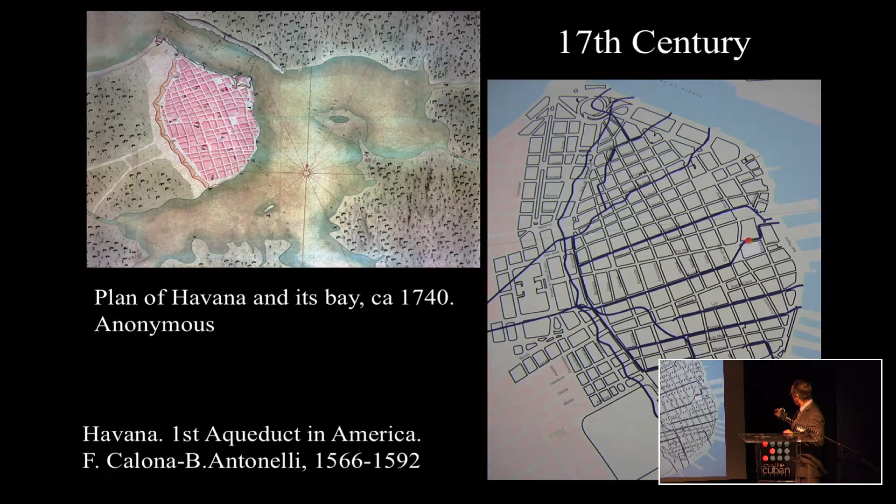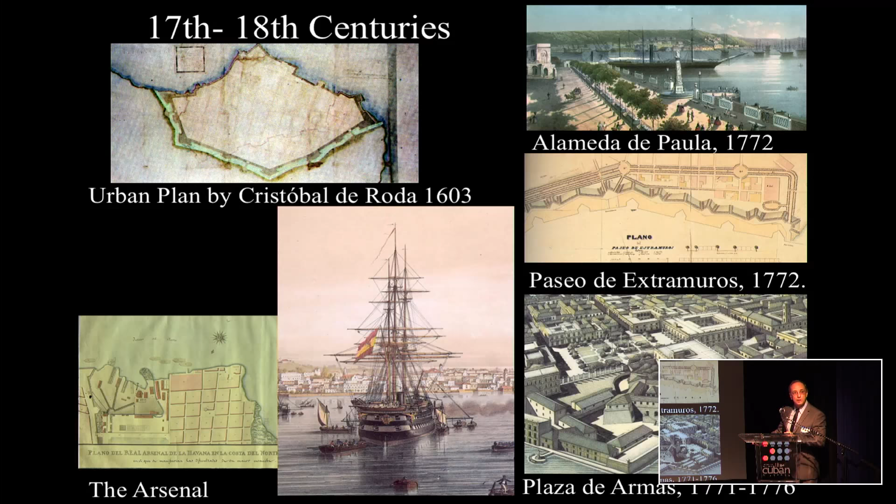And then Havana became the most important colony for Spain, as we know. So everything would be rehearsed there. Everything would happen there before any other place. And that would also be a trademark for Cuba along the years and along the centuries.

In the 19th century, the first expansion plan was carried out by colonial engineer Antonio Maria de la Torre in Havana, Cuba. The first expansion of the whole America region.

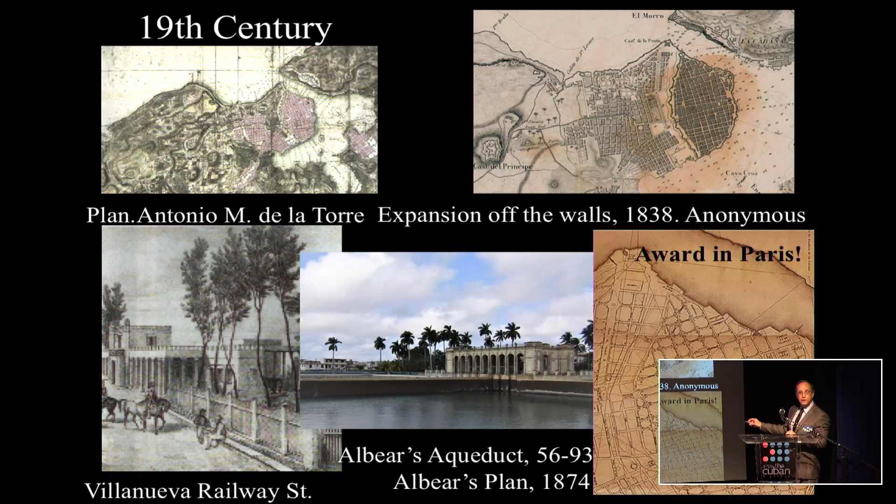And the first prize in the international exhibition in Paris was awarded to Cuban engineer Francisco de Albear, who could not see this project finished because he died before. But he was also the man who conceived of the Malecón, the first idea for the famous Malecón of Havana, that was implemented by U.S. engineers Meade and Whitney between 1898 and 1901. That was Albear's idea, so it was the embryo that U.S. engineers used for developing this idea further.

This is a glorious period in Cuba because the U.S. engineers developed, number one, a huge survey of all the infrastructure, as you can see in these plans here, and also works that turned Havana into something different from the colonial times.

To start with the Malecón, and then the paving of the streets with a very progressive system, the macadam system, and then also the first and most innovative sewage system took place in Cuba.

And this is one of what we call the 7 wonders, but I guess there are more than 7 wonders of Cuban engineering: the sewage siphon, which was carried out by engineer Samuel Gray.

And then in the 1930s, but started in the 1920s, we have the Central Highway, we have the FOCSA building, which is also something to be proud of because Cuban engineers and Cuban architects working together proved that they could do an apartment building out of reinforced concrete instead of a steel frame structure.

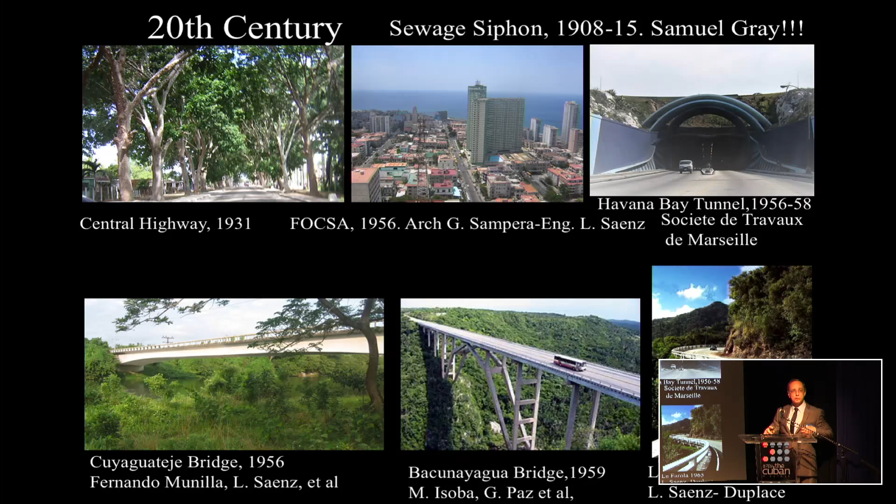Then also the Havana Bay Tunnel, built in 1958, is also something to be proud of. And then the bridges, the several bridges that were built in Cuba.

But we're now in present Cuba, the 21st century, and we should be aware of the challenges and also the opportunities that we have for engineering projects in Cuba, because infrastructure is a key factor for any future development. So we have acknowledged it in the plans we have conceived and drafted for the city.

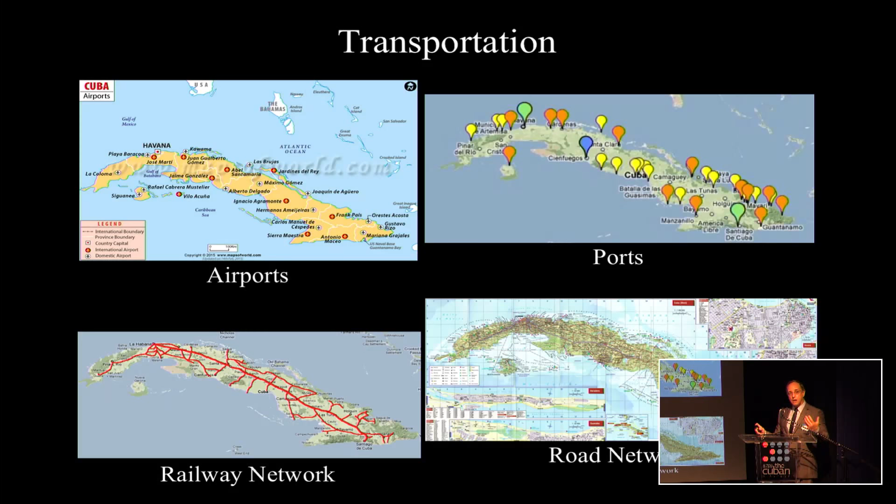Number one, transportation. Infrastructure transportation needs an upgrade, and when we refer to an upgrade, we almost say starting from scratch. So there's a lot of work here for any engineering firm: airports, ports, and the whole railway. As you know, Cuba pioneered in railway.

In 1837, Cuba became the first country in America to have a railroad after the US and the UK. So that's also something we're proud of, and we're going to see the state of the railway station.

So when it comes to airports, we know that the many airports in Cuba are facing great challenges because of the increase of tourism. The current Havana airport that I'm going to show is in critical conditions because it cannot grow further. So we believe, and according to this, this is included in our master plans, that the next future airport for Cuba is one that has the best runways.

That was built in the 1940s by U.S. engineers. The company was called La Cayuga, and it was built in San Antonio de los Baños, right in the outskirts of Havana, and connected with the Novia del Mediodía highway that I'm going to show also. So we believe that this is the place where the next future international airport, that we aspire to be not only an international airport, but an international hub, meaning an intermodal terminal.

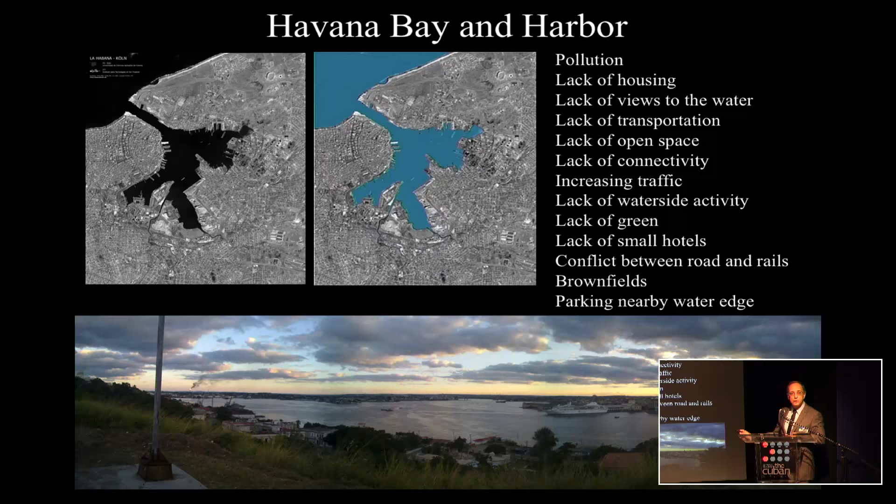And then there are other ports that are traditionally important, like the port of Matanzas, Santiago de Cuba, Cienfuegos, and some of them that are also located in beautiful bays, like is the case for Matanzas and Cienfuegos specifically, but also Gibara, that was turned down by recent hurricanes.

So when it comes to railway, this is the Central Railway Station built in 1912 that is going to become the Museum of the Railway in Cuba. And the terminal is going to be relocated, a great opportunity for the railway in Cuba.

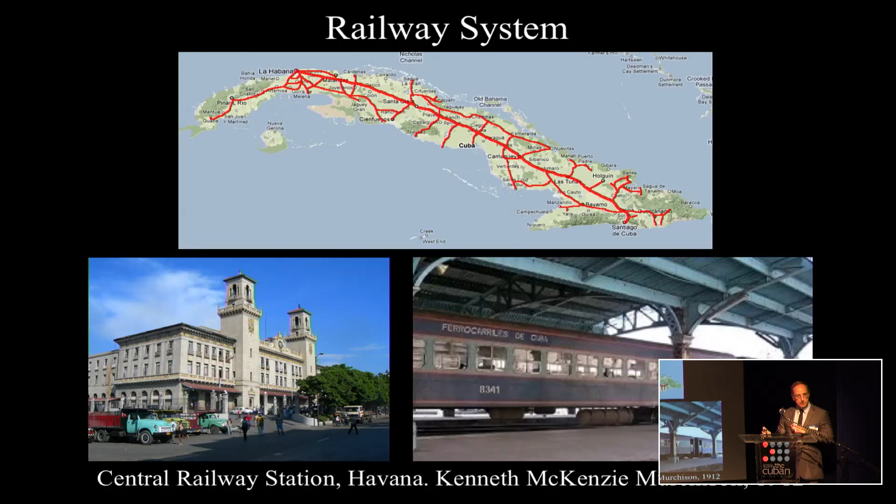But this is important because Cuba, as you see, is an elongated island. So railway systems make a lot of sense - it's the most efficient transportation concept that we can use. And as we see, it was developed across the island.

We are also proud to keep the only electric train running in America, the Hershey train, related to the Hershey chocolate family, who had beautiful gardens in their batey. I don't know if there's someone related to Hershey here, but chocolate was not only a byproduct of this train. We believe this is part of our industrial heritage that should be maintained and kept, something to bear in mind for the future.

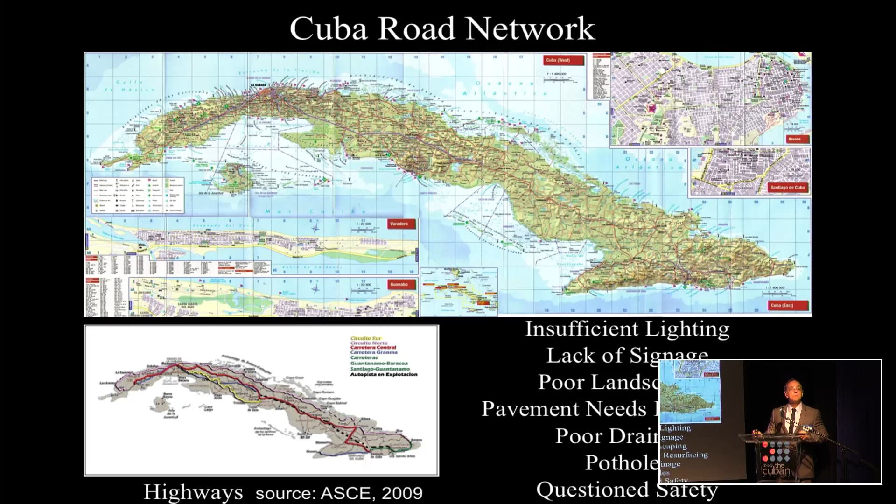Well, what about roads, bridges, and tunnels? This is a map showing the thoroughfare, and you can see that yes, there are roads, but as recently acknowledged by the current president of Cuba, they are in bad conditions. He called it a living cemetery, because there's lack of lighting and appropriate signalization. So it's very dangerous for people who rent a car and go across the island. It's a real danger, a threat.

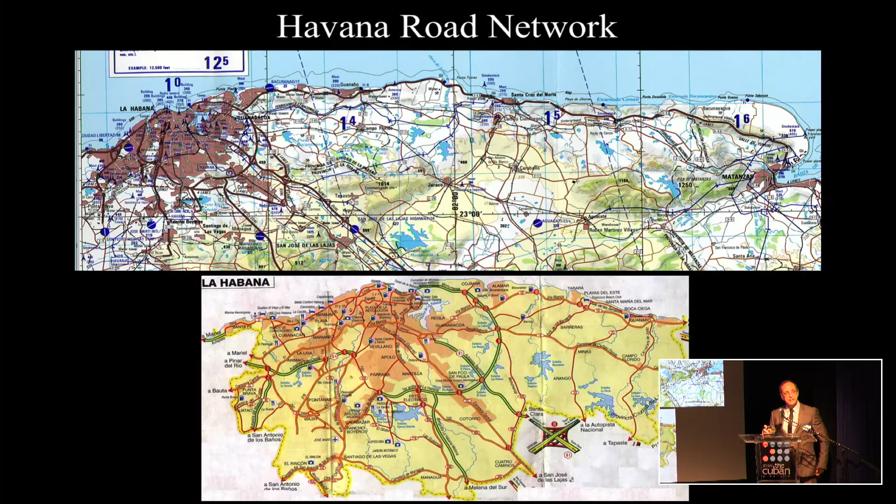So when it comes to Havana, the capital, you see here how well served it is by roads, but you find that they have holes and are not well lit as well. And then the highways, they're really in bad shape. They have drainage problems, they flood, and you can see that they need also to be taken care of.

Well, the tunnel, this is good news. It was renovated, had a comprehensive renovation some years ago, so it's in good shape. Besides, it was very well built by this French company in 1958. But then some other tunnels, like the one on Linea Street, on Fifth Avenue, etc., they flood. They also need maintenance and need a project that takes care of them.

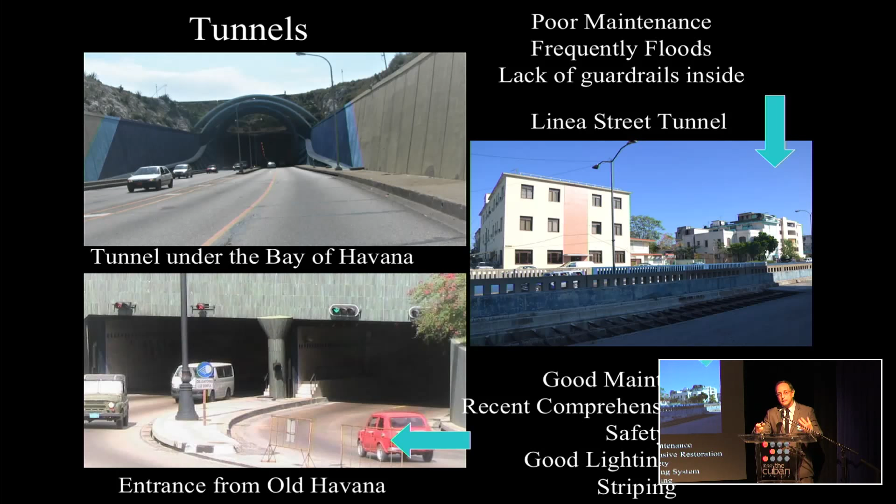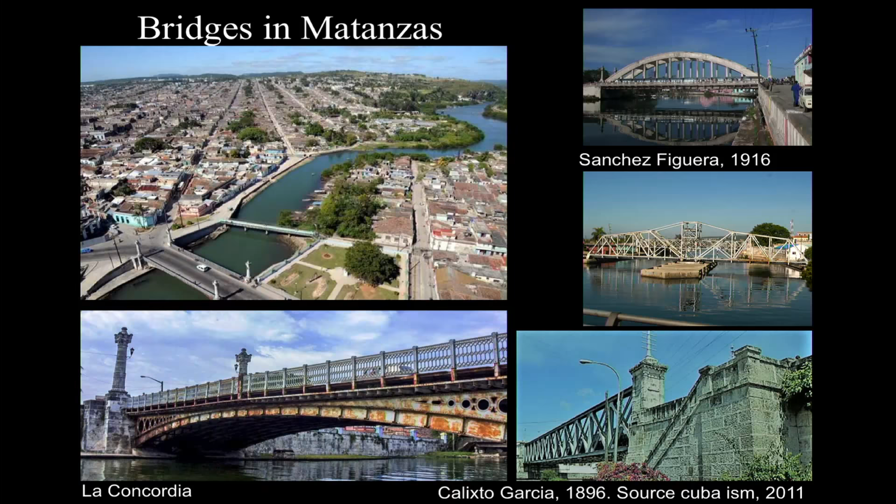Then we have these conditions. These were bridges built by American companies working in Cuba. There was a spirit of collaboration along the whole stretch between 1902 and 1958 between Cuban and American engineers and architects, and the most important construction and engineering companies worked in Cuba, working closely with Cuban architects and engineers. So there's a whole history, a whole culture about that.

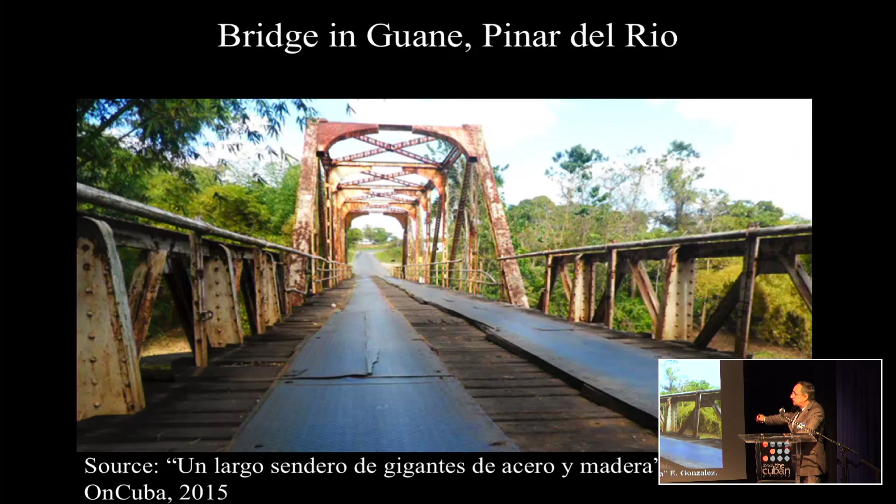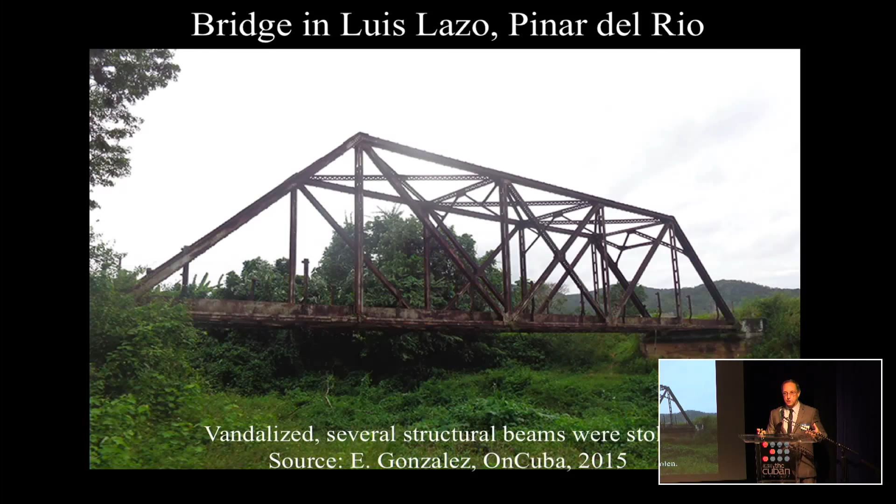But right now what we find is that this deteriorated condition forbids transit. Some of these bridges have been vandalized, giving us the idea of a very dangerous condition. These are really frightening pictures, because you think, well, what if I don't know about this? What if I get there and find these conditions? So all of them need maintenance.

And the Malecon, which is a wonderful avenue considered the living room of Havana, is facing flooding problems. It has become a real problem for the city, and we don't see any solution in the short term. This is why our proposal tackles that, solving it in a definitive way.

And then there are other streets that you may remember, or at least your families, that are very important in the city and how it functions, that are really claiming maintenance and condition. That's also the case for the rest of the country. I would say that Cienfuegos is kind of an exception - it's a very well-kept city, very well maintained, so this is really an exception.

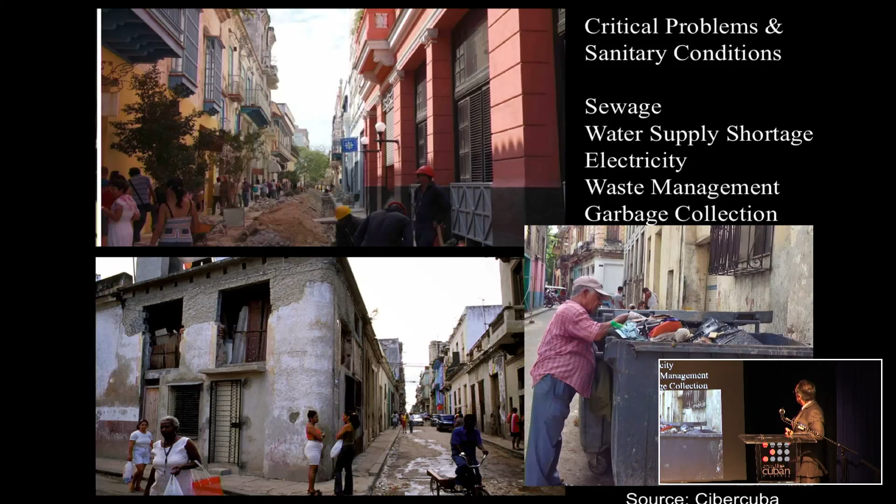Water infrastructure and garbage are really critical in Cuba. Water supply is tremendously important. Havana has real problems with water supply and garbage, and just so you know, this is public record, the Japanese government has made a donation for the city of Havana to take care of garbage collection. This is completely unacceptable - how can a foreign government help us with this? We should take care of this as we take care of our homes. So you see the condition, the problem with sewage, water supply shortage, electricity, waste management, and sadly, garbage collection.

So this is not only the streets but also the sidewalks, as we were talking this morning. This turns the city into a completely unacceptable condition for normal daily life functioning. There's garbage collection issues, health problems derived from poor and dangerous sanitary conditions. This is something we should tackle immediately.

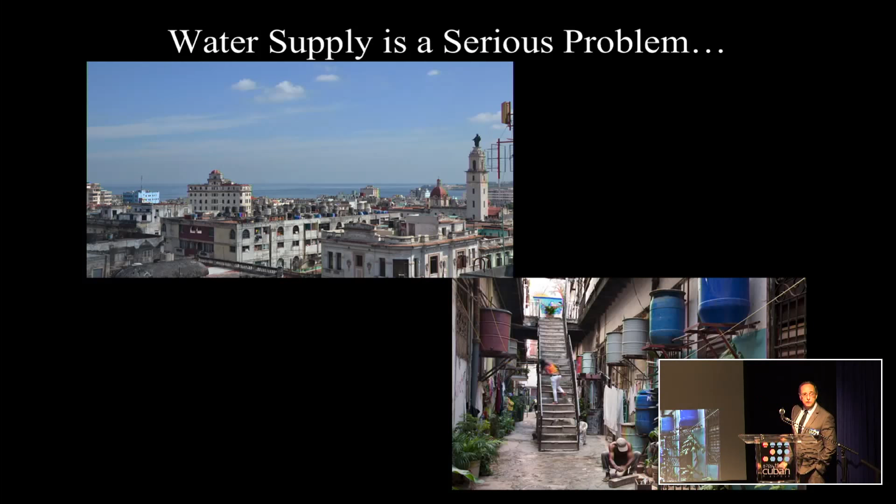As I said, water supply is an issue, and this is why you see so many water reservoirs on the roofs of the buildings, because of the insufficient water supply to houses, etc.

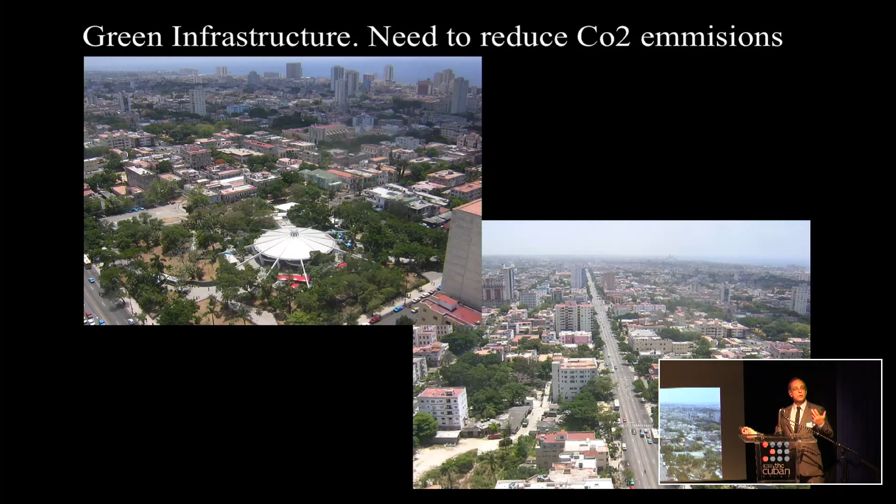So green infrastructure, to say the least, is something we aspire to increase. All this has been considered in the plans we have drafted for Havana and for Cuba, because we believe that infrastructure planning is key for the future of Cuba, and even though we cannot see the future, we can plan for it.

So these are the concepts that the master plan of Havana is based upon, and they're illustrated here. I don't have time to go through all this in detail. I would love to, but that's a different lecture I usually give.

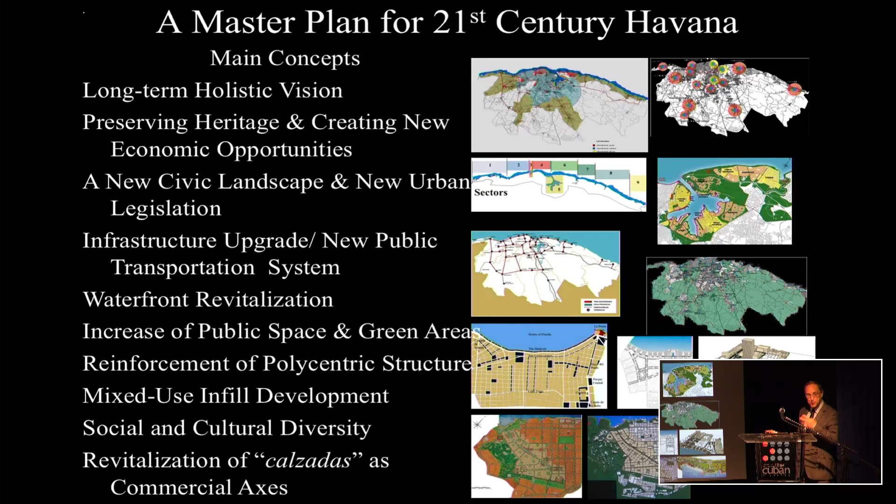Just for you to have an idea of the potential of the places we have planned for the harbor. For the first time in history, the master plan of Havana has not been dictated by any government, and is not related to any military apparatus.

In colonial times, there were always military plans, dictated by the army, dictated by defensive conditions. Most recently, the plans that Havana has had have been dictated by the government. This is, for the first time, a plan that I have conceived based upon the needs of Havana, and based on the history, the idiosyncrasy, and the geography of the city, thinking of its future development.

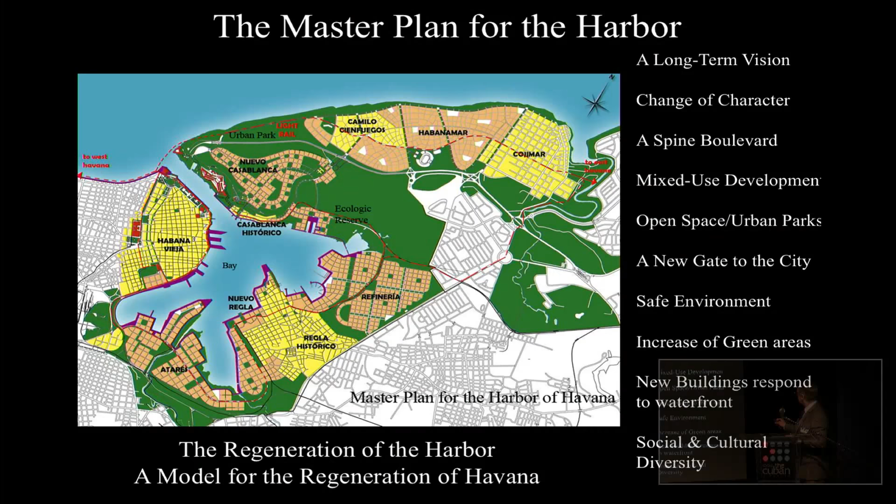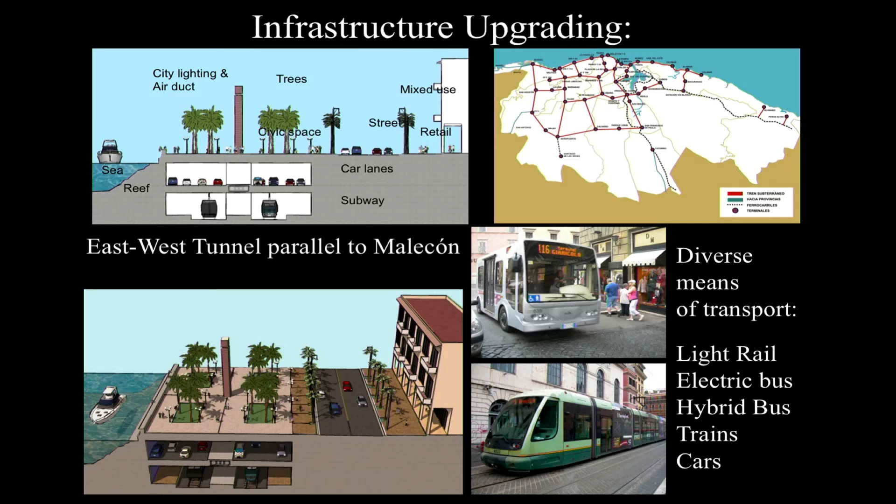As I said, this is based on these concepts. This is probably the most interesting and ambitious engineering project: an east-west tunnel parallel to the Malecon, taking advantage of the slope of the reef. It will solve the congestion, it will solve the flooding, and it will create a wonderful promenade along the whole Malecon.

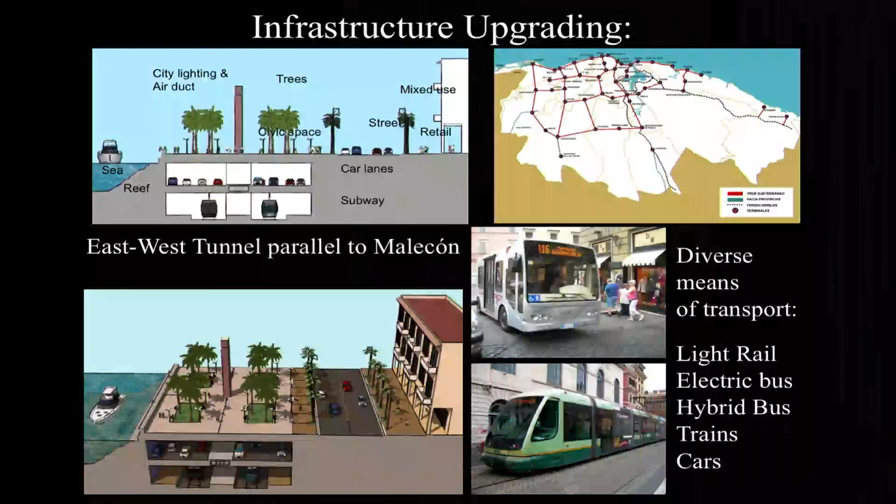And will give Havana a different and contemporary image, like we see in Barcelona. It will also give Havana an increase of green infrastructure, because that would allow it to plant a lot of trees. This part is claimed in such a way that all this becomes a beautiful plaza.

This is part of the plan for the sector of Central Havana, which is the most dilapidated district in Havana. This is the existing former National Bank of Cuba, where the vaults are still there in this building, even though it was turned into a hospital in 1972.

As we see, the buildings in white are new, and they provide squares and a lot of open space, civic space for the people.

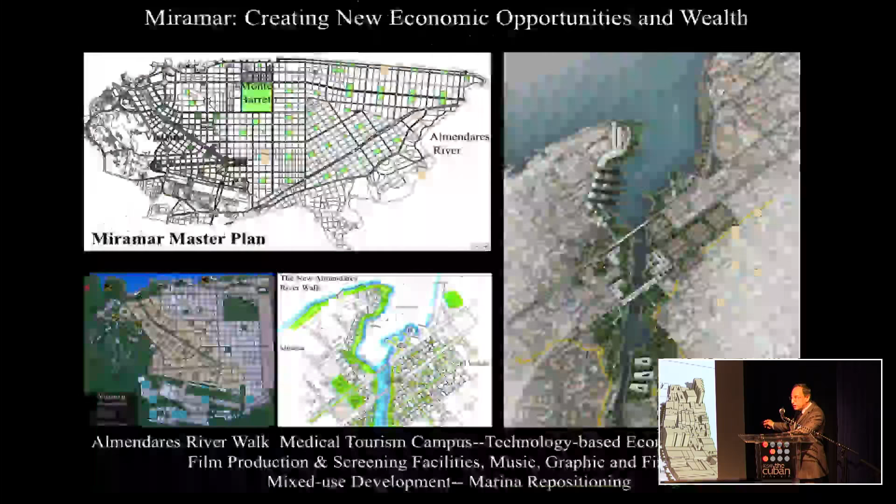This is a plan for Miramar that we believe is very important because of the presence of the Almendares River, which is also another engineering project.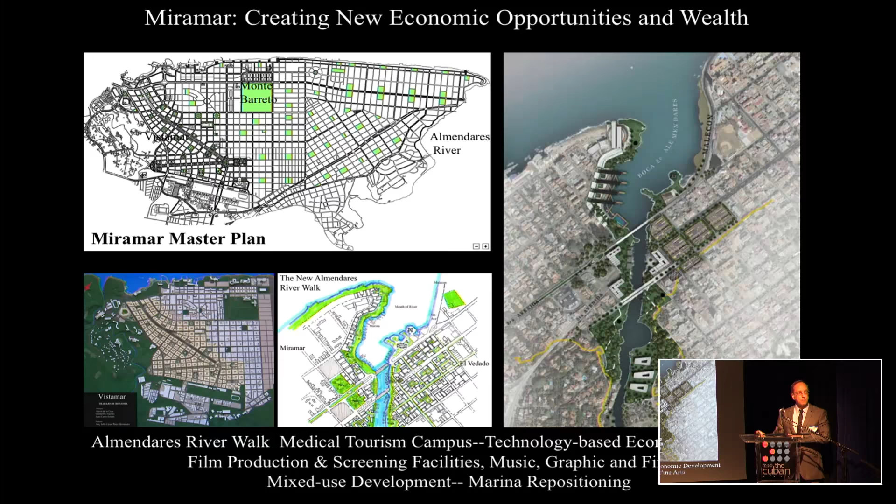And finally, this is a master plan for Cuba, for the future of Cuba, that we are currently working on. These are the concepts that it is based upon.

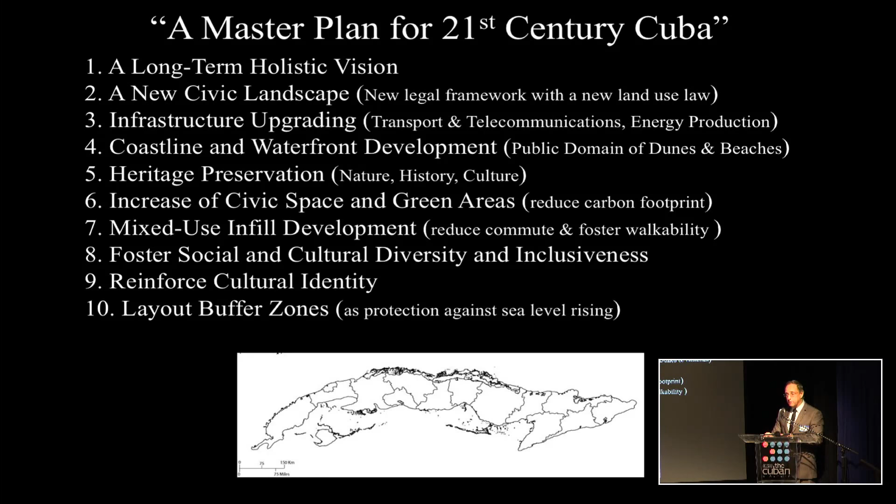We believe that as we speak, the embryo of this transformation is taking over all of us, Cubans and Cuban-Americans, who believe that Cuba has a wonderful future as it had a wonderful past. Thank you very much.

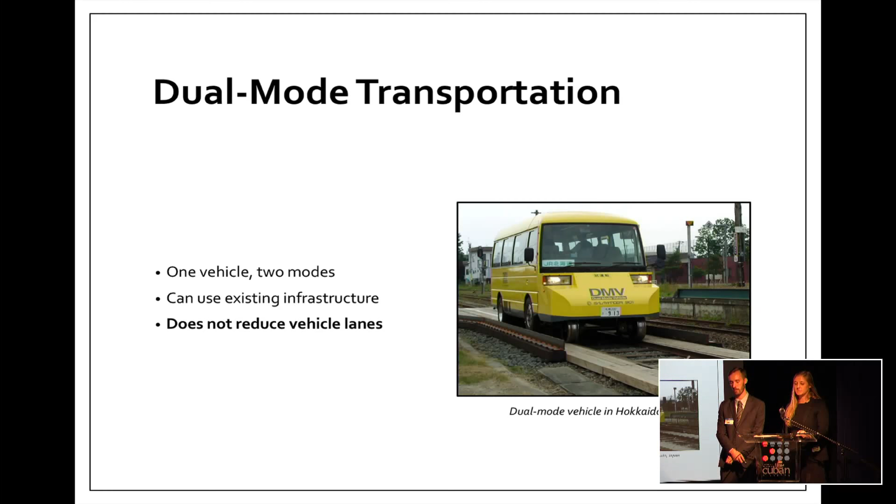We felt there needed to be a more creative and innovative approach for this project. Dual mode transportation is best understood as a route design; we chose this method because dual mode transportation systems take one vehicle utilizing two modes of transportation, consisting of road or rail, road or air, or road and water. The picture to the right is an existing vehicle in Hokkaido, Japan accessible to both land and rail. The benefit is that it uses existing infrastructure not currently used for transit without reducing the lanes, which, after last year's presentation where I submitted a project on bus rapid transit systems, we realized was one of the major pitfalls, as it may create more issues than it resolves.

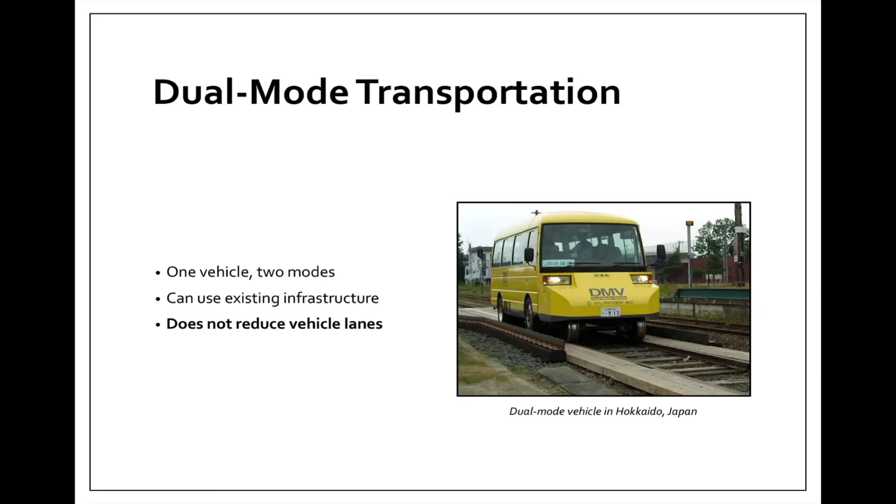As mentioned, dual mode transportation needs adapted vehicles capable of operation on road and rail. Hi-rail vehicle technology makes this happen by converting road vehicles to rail vehicles. While in use, the rolling stock is tucked away out of sight, but when needed can be easily employed.

Harsco Rail, one of the major manufacturers of hi-rail vehicle technology, was contacted to get estimates on the price to convert these vehicles to a hi-rail vehicle, but no response was given. However, we found limited data online, which said prices would be less than $10,000 for a 5-passenger vehicle such as an F-150, around $40,000 to $50,000 for a medium duty truck, and around $100,000 to $300,000 for a heavy duty truck such as a Freightliner.

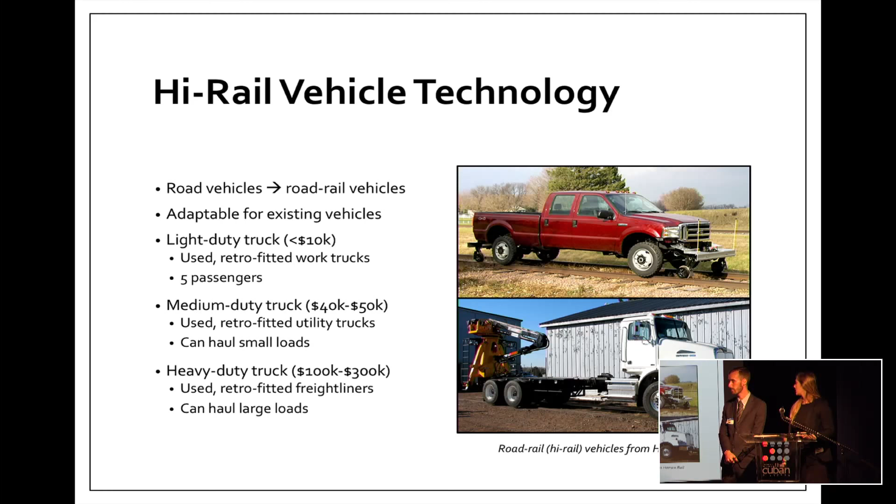To calculate the potential ridership, we used the projected numbers from last year's Bus Rapid Transit submittal to serve as a benchmark for our dual mode transit project.

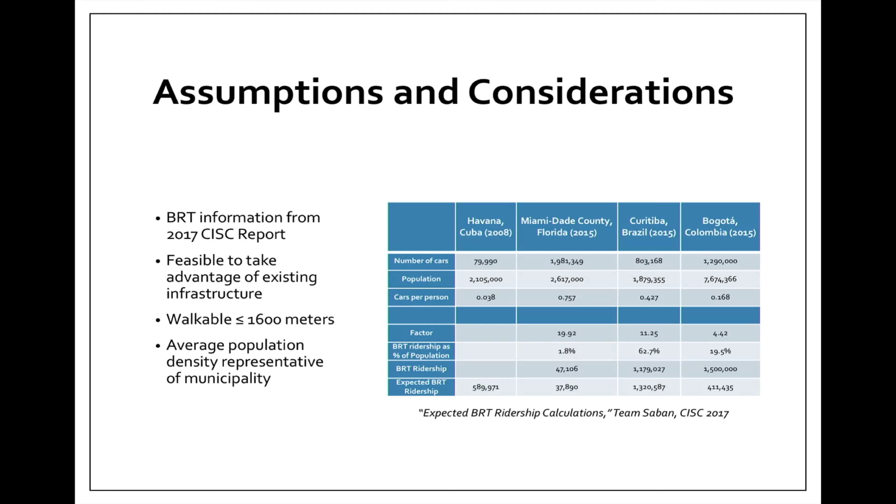We want to note that we considered a few important assumptions and considerations in our project. The major assumption is that this general concept is feasible using existing infrastructure, particularly the railroad network in Cuba. We do understand and have some concerns related to that rail infrastructure that we'll address later, as you might have yourself. But in order to continue with the route design itself, we had to assume this is feasible in general. Next, we had to decide what's considered walkable.

Different literature, as well as some experience I have with transportation, suggests that the upper threshold of what someone is willing to walk to some form of transit is around 1,600 meters, or a mile. So we chose that threshold to move forward with our route design.

Finally, we decided that the average population density would need to be representative of a municipality. We understand that from city block to city block this might not be perfectly accurate—it could overestimate in some areas while underestimating in others—but we felt it was appropriate to move forward with a more detailed analysis of our service area population.

As you can see, and as I will discuss, Avenida de la Independencia fits the bill in all 3 of those categories. We took a more qualitative approach in how we chose the corridor, but we wanted to take a more technical geospatial approach using geographic information systems for the actual route design of the project.

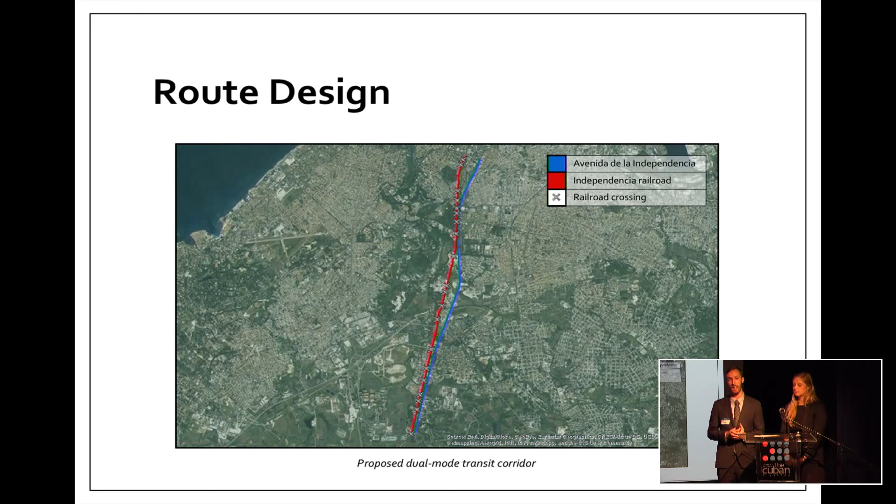So we zoomed in as clearly and closely as we could, went through and visually inspected, starting toward the south near CUJAE, and built our line shapefiles segment by segment, inspecting each piece of satellite imagery to make sure it was as accurate as possible. Because satellite imagery is actually a mosaic of various images captured on different dates, we felt most comfortable visually inspecting this corridor to ensure its accuracy. We did so for both the roadway and the railway, as well as the various railroad intersections, and visually confirmed that.

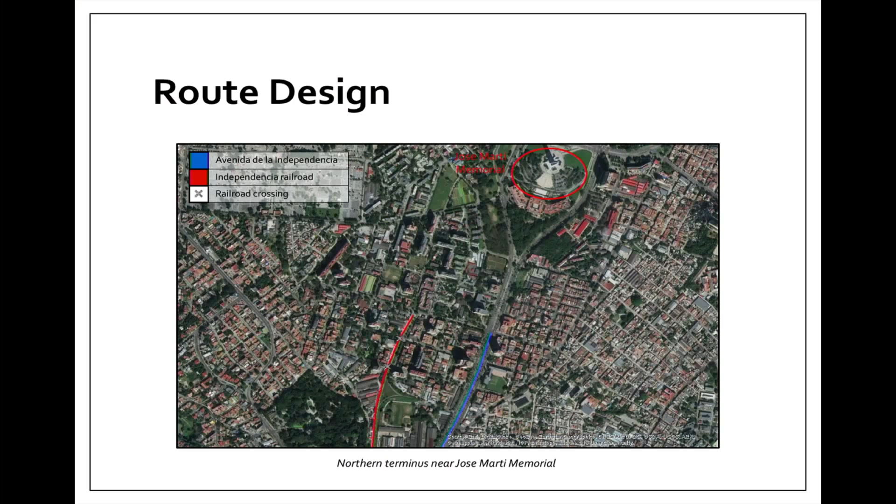As you move in closer, you begin to see some of the issues related to the spatial resolution—the closer you get in, the harder it is to see some of those certain details.

Under this red line that represents our railroad, there could be one track, two tracks, three tracks. There could be various informal crossings. There could be things that we are unable to detect.

We knew we wanted more detail in order to confirm our rail networks that we were building into our road networks. So using open source data through OpenStreetMaps, we were able to import an additional road network represented in the geospatial network, as well as a rail network for the greater Havana region. Doing so, and crossing these two modes of transportation, we were able to find an additional 6 railroad crossings in addition to the 15 we found through visual inspection, creating a total of 21 railroad intersections with our road network on our 8-kilometer corridor.

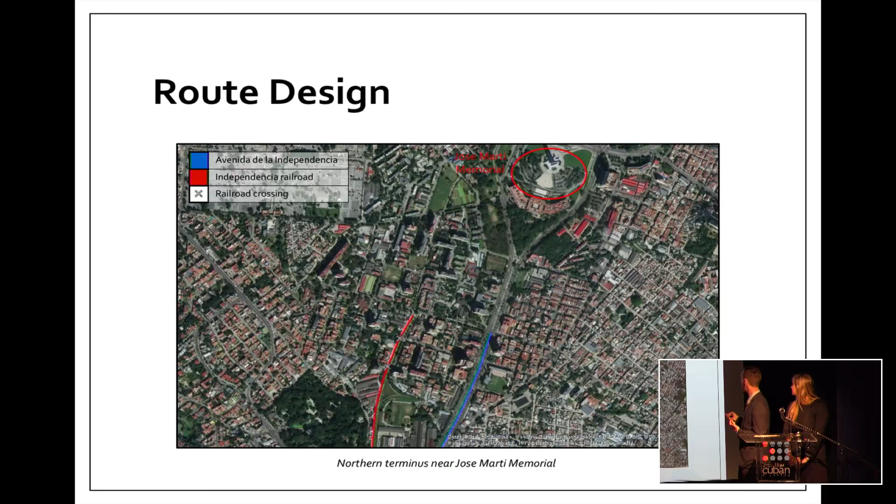This is our northern terminus of the portion, getting into that urban downtown core that we mentioned as one of our 3 categories, just south of the Jose Marti Memorial near the urban core.

These are what we refer to as multimodal transfer stations. This is where our vehicles can go between our two modes of network, between the blue line, which represents Avenida de la Independencia, the road network, and the red line, which is our rail network, to combine that. This is where the high-rail vehicle technology can be employed, and the vehicles can go from rail to road or from road to rail, depending on the conditions of traffic.

We do want to note that while there are 21 railroad crossings, and these are transfer stations, they are not stations in the sense that every single one of them would be stopped at when on the ride.

We are intending for this to perform much more similar to personal rapid transit, where, for instance, 5 or 6 students, depending on the vehicle size—if it were, for example, the chassis of an F-150 truck or a small SUV—could get into a small personal vehicle with similar or same destinations along the corridor and can stop at a few shared destinations, skipping most of the stops along the way.

Because we want to maintain small vehicle sizes, we believe that we can actually go around and use the network much more fluidly rather than putting a large-scale train on there and dealing with some of the issues related to that. We felt that would help us avoid some of the pitfalls of bus rapid transit and light rail, where you are stopping at every single stop and not actually getting to where you want to go fast.

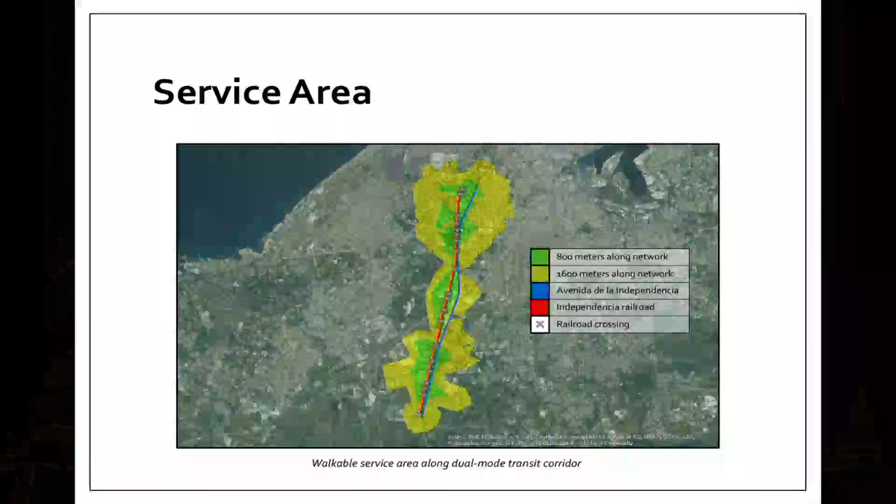So using ArcGIS's network analyst tool, we input the 21 different multimodal stations, or the railroad crossings, as our facilities, and then using that tool, we were able to generate out, along the road network, the walking distances that someone could access our system. In green, you can see all of the areas within 800 meters walking distance along the road network, and then in yellow, it extends it out to 1,600 meters.

Now, according to our calculations, this gives us a total service area, meaning walking distance within our transit corridor, of approximately 21 kilometers.

Going on from that, we wanted to know who we can actually serve in this area. We didn't want to just take 21 kilometers, compare that to Greater Havana, and assume that was a proportional representation of the population. We wanted more detail.

So we went to the National Statistics Office of Cuba, took the total square area of each of the municipalities that our service area intersects, took the total population of each of those municipalities—the information is from the 2010 census—and calculated the average population density of each municipality.

We then compared it to its representation in our service area and found each service area population, for a total service area population of approximately 144,000 people. That's to say, 144,000 people, we believe, according to our calculations, could access this dual mode transit corridor by simply walking.

As Liz referenced earlier, we used her bus rapid transit project as a benchmark of what we could achieve for daily ridership, if we want to achieve similar numbers to other examples of transportation in South America and North America. If we were able to achieve Miami's level of 2% daily riders, we could get just shy of 3,000 daily riders in this corridor. Bogota, almost 30,000 riders. And if we were able to match Curitiba's numbers of over 60%, this corridor alone could have over 90,000 daily riders.

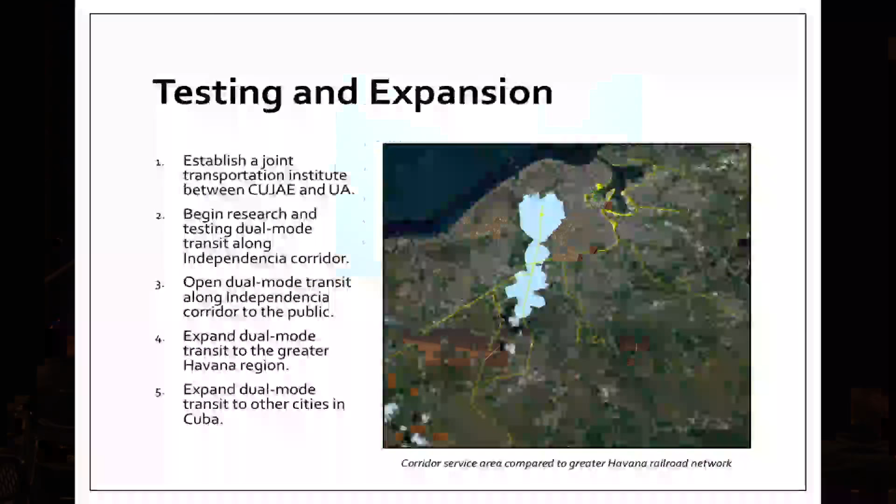We think it's vital that we use geographic information systems, so in our research and testing phase, we can begin to collect this information segment by segment, railroad crossing by railroad crossing, and create a centralized database in the actual file we've created for this project, continuing that forward throughout the design process.

In the information we looked through, we believe a low capital cost upgrade to a railroad crossing, for instance with basic pedestrian signaling and pavement markings, could be as low as $30,000. For a complete reworking with full automatic detection, including automated gates, it could be between $250,000 to $300,000 per railroad crossing, depending on the Department of Transportation information you get your data from.

From this picture, you can see our service area is just a small sliver of the Greater Havana region, and just a small part of the railroad network in the Greater Havana area. We believe by working forward with this testing phase, we can open our corridor up to Havana residents, and beyond that, continue this research and testing phase, expanding our system to the rest of the Greater Havana region, and eventually to other major cities in Cuba.

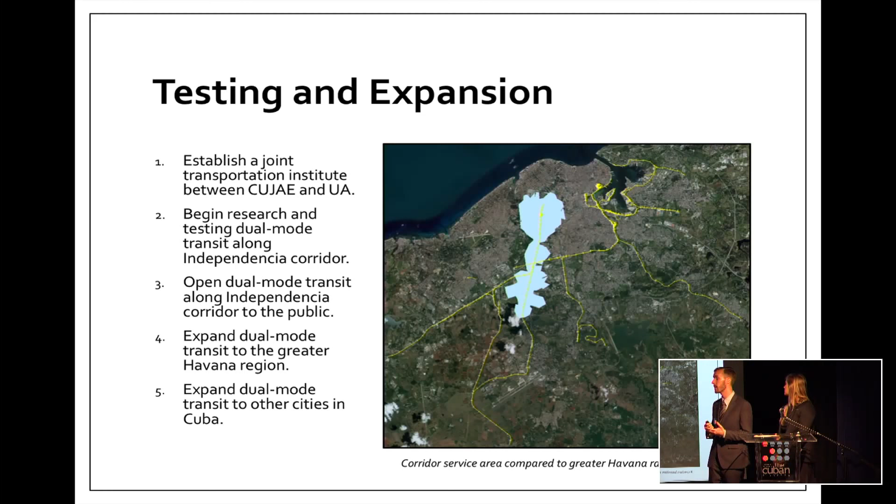Today we've discussed with you our idea for taking the combined utilization of road and rail networks to increase transit accessibility in the city of Havana, Cuba, through our idea of dual mode transit. We think it's very important that a new, innovative approach is taken to solve some of these issues.

More buses, more taxis, more cars mean more of the same problems. We think that dual mode transit can increase transit accessibility and mobility for the residents of Havana and beyond, and we do not think there's any reason Cuba cannot or should not be at the forefront of transportation innovation. We hope that dual mode transit and Crimson Transit can be a key partner in that process. Thank you, and we'll now take any questions.

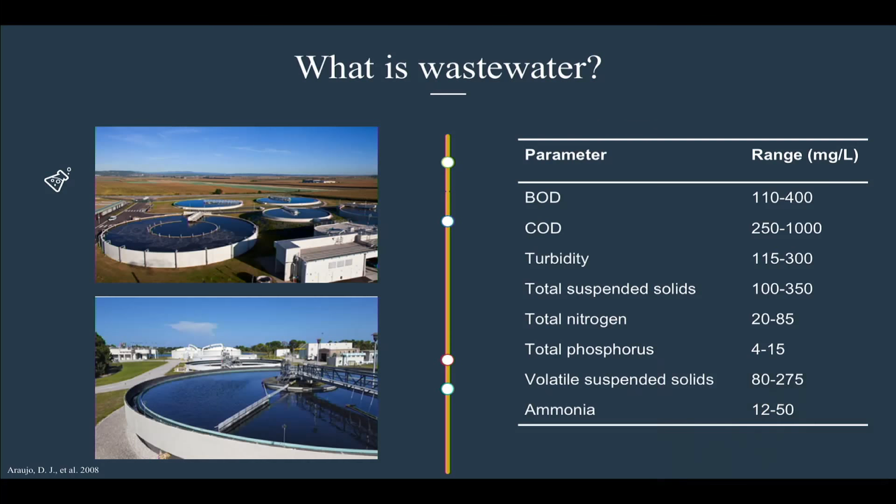To begin, I'll briefly describe the characteristics of wastewater. Typically there's BOD, biochemical oxygen demand, and COD, chemical oxygen demand, which describe the oxygen-depleting species in the wastewater. This is especially important because too much BOD or COD in the wastewater will make the receiving waters, such as the surface waters in Cuba, anaerobic, which will suffocate organisms and flora in those receiving waters.

So we will be treating this wastewater to remove the pollutants, to promote public health, to preserve aquatic life and wildlife habitat, and to promote recreation and quality of life in Havana, Cuba.

There are some conventional steps to treating wastewater. Typically we start with preliminary treatment, which usually includes grit chambers or a large filter to remove large floating debris, typically removing 100% of large debris. Then we move on to primary treatment, which removes 60% of solids and 35% of BOD, usually consisting of a mechanical process including sedimentation tanks and separation by flotation.

Secondary treatment removes 85% of BOD and usually consists of biological treatment such as activated sludge processes. Finally, tertiary treatment includes chlorination and filtration using biochar, activated carbon, sand, and anthracite, which removes 95% of the remaining BOD and solids, as well as nitrogen and phosphorus. For the purposes of our presentation, we will be focusing on primary and secondary treatment.

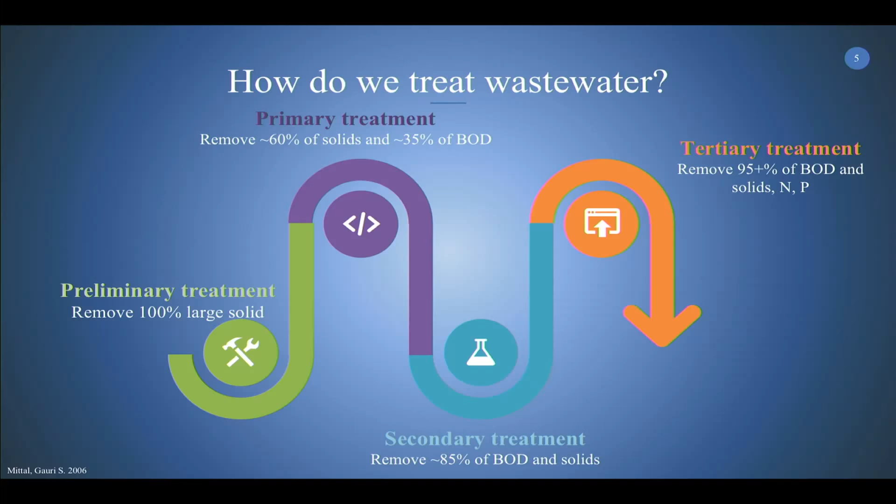So in Cuba, the wastewater treatment crisis is occurring in much of the surface water, and the surface water accounts for 65% of Cuba's available water supply, and there are 8 priority watersheds, which serve 40% of the population.

However, unfortunately, these are not operating up to capacity, which means that a lot of the wastewater discharge from industry, agriculture, and municipal wastewater is discharging directly into the surface waters. And you may know that the Almendares is hydraulically linked to the Vento Aquifer, which supplies a lot of the drinking water in Cuba. Havana.

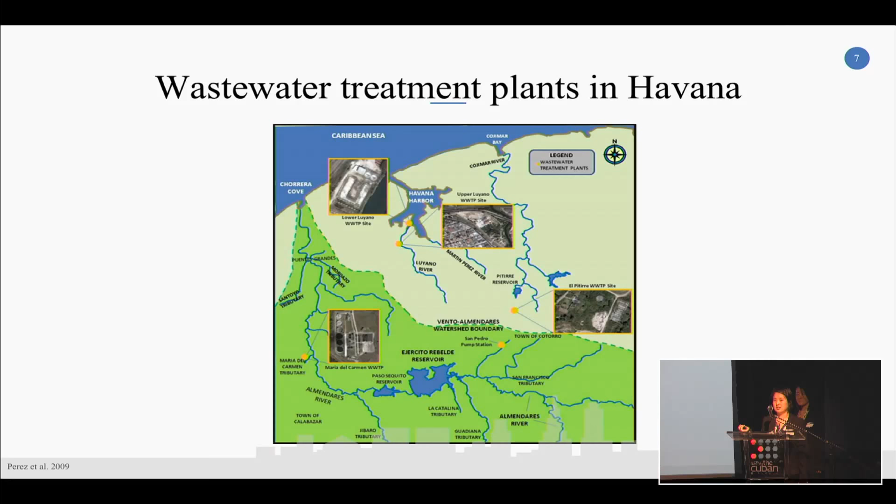So currently, the demand for wastewater treatment is to serve 2.2 million people in Havana, and the overall demand is 0.6 million cubic meters per day, or 0.27 cubic meters per person per day. However, the capacity is that only 2 large plants are operating in Havana, and they're only at 30% capacity, which means that even if all of the capacity of wastewater treatment plants were in operation, they would only serve about 15% of existing wastewater effluents.

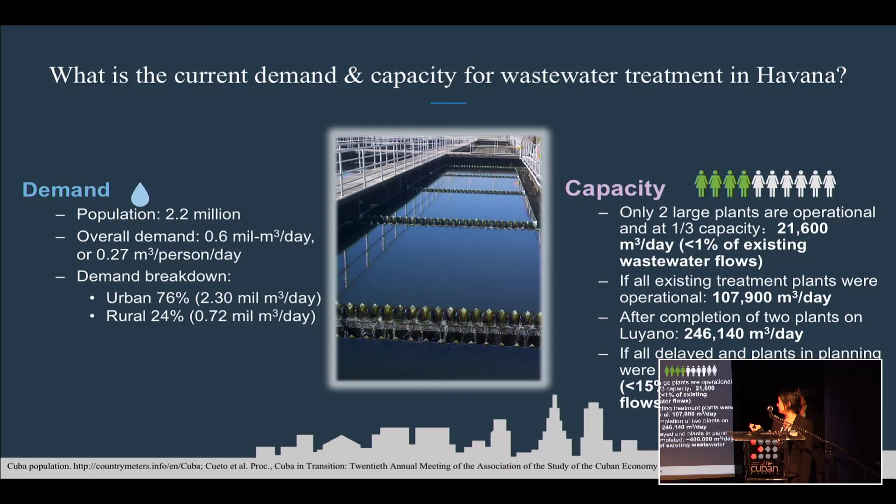So clearly the current wastewater infrastructure is not sufficient to meet the demands of Cuba, especially Havana City.

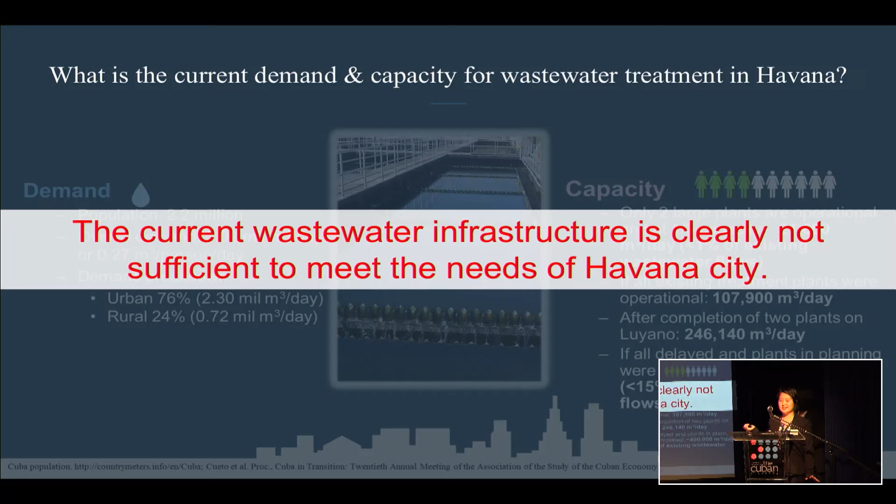So we plan to solve this wastewater issue using a microalgae-based wastewater plant. This microalgae-based wastewater plant utilizes microalgae, which is microscopic photosynthetic algae, which characteristically has a rapid growth rate, as well as the highest biomass production per surface area than any other organism.

And because they produce biomass using photosynthesis, they can incorporate important nutrients such as inorganic phosphorus and nitrogen into their biomass to reduce the amount of nutrients in the effluent of the wastewater, which would cause eutrophication in the receiving waters.

And because they can incorporate inorganic nitrogen, phosphorus, and even heavy metals, this can be used to treat industrial, agricultural, and municipal wastewaters.

We chose microalgae-based wastewater treatment plant because we believe that the conventional wastewater treatment plant was not sufficient to meet the needs of Havana. Conventional wastewater treatment, including activated sludge processes, requires a significant amount of chemical additives and energy to aerate the wastewater.

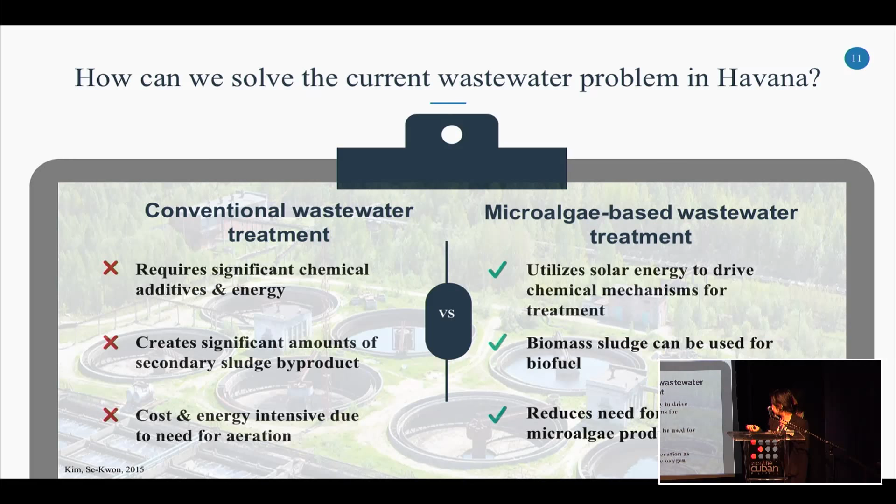It was successful in the past, not specifically for microalgae, but a biomass-based wastewater treatment plant was successful in Cuba at a pilot plant utilizing hyacinth, which is a water plant.

And it incorporated BOD, TKN, which is total nitrogen, total phosphorus, and total suspended solids into their biomass, reducing eutrophication in receiving waters. And there are successful examples of integrated microalgae ponds and high-rate algal ponds in New Zealand and rural California.

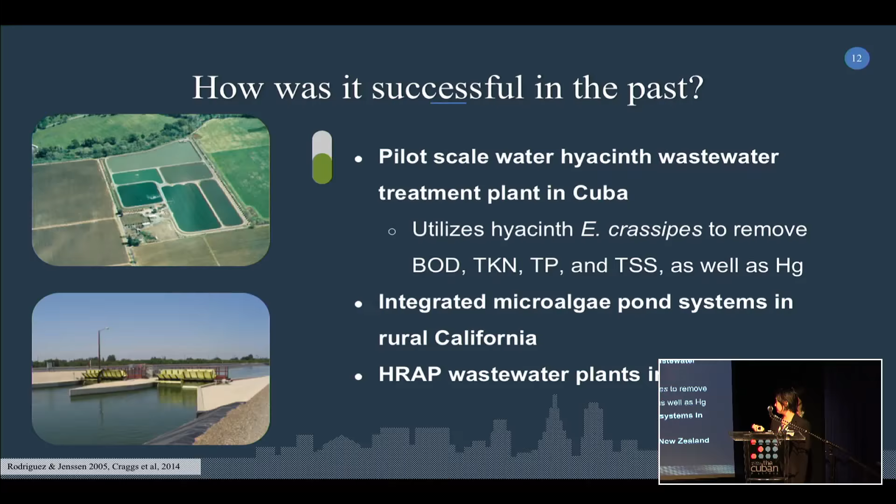So our goal is to design a microalgae-based wastewater treatment plant for a total of 10,500 people to produce 2,835 cubic meters of wastewater per day, utilizing its low-cost, high-efficient, and low-energy need wastewater treatment plant. And this is modified from our original proposal, just scaled down by a factor, just for ease of presentation.

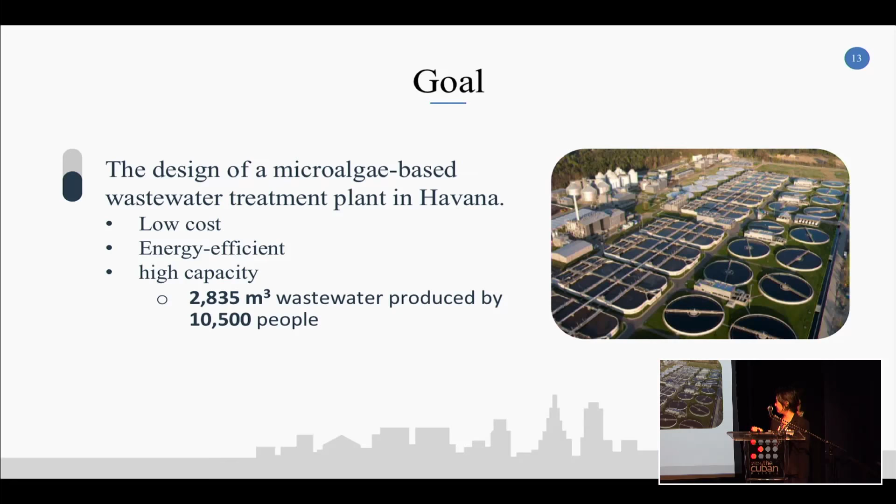So here is our overall design of the wastewater treatment plant. It mainly contains 4 processes. The first one is a preliminary treatment, and Mario just talked about the preliminary treatment process.

We will use the filters to remove the large solids. And the second one is primary treatment. We will use the covered anaerobic pond to digest the pollutants in the wastewater using anaerobic digestion. And the third one, we will use the high-rate algal pond as a secondary treatment process to further digest the organics and inorganics in the wastewater.

And the final step, we will use the algal harvest method to collect the biomass and resupply it to the covered anaerobic pond.

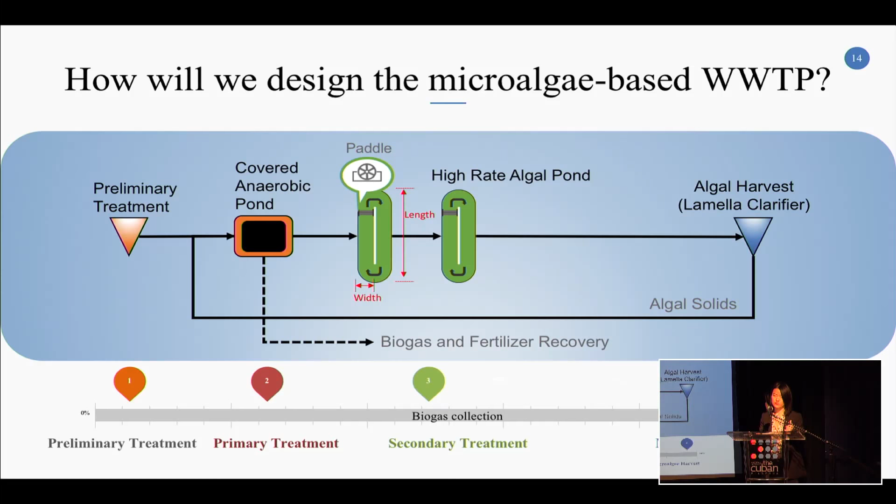So the first one is a preliminary treatment. We will use the bar space at 20 to 60 millimeters at a flow rate range of 0.2 to 0.4 meter per second to remove the large solids. And the removal efficiency of large solids can reach 100%.

And the next one is primary treatment process. We will use a covered anaerobic pond. We call it CAP. And the objective is to remove the most organics and inorganics in the wastewater.

And the principle is to use the microbes to digest the pollutants under the anaerobic digestion process. And the energy output is methane, so the methane can further be used to generate electricity, so it is very energy efficient.

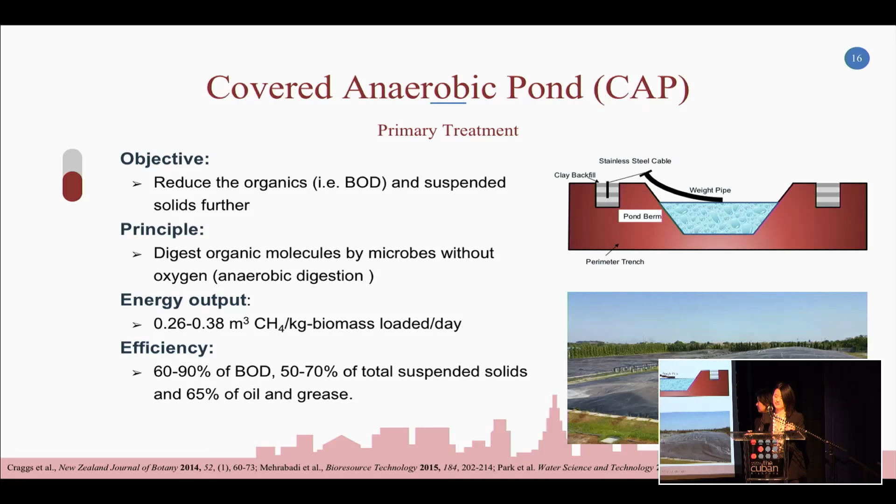And the efficiency to remove the pollutants is high. It's about 60 to 90% of BOD and 50 to 70% of the total suspended solids, and even 65% for the oil and grease.

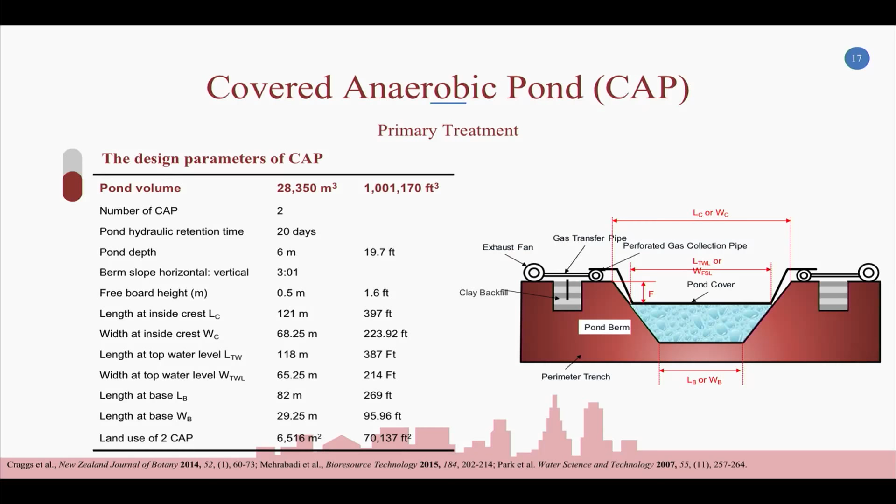Here is a diagram of our design. Because we want to extract the biogas from the CAP pond, we will cover the CAP using a specific material. And we want to meet the capacity of 2,800 cubic wastewater.

So we plan to build 2 CAP ponds, and each CAP pond will require 20 days retention time. Based on our calculation, the pond volume of each should be about 28,000 cubic meters, and the guideline for CAP construction requires that the pond depth should be less than 6 meters.

So we use 6 meters for the pond depth. And the freeboard height should be less than 0.6 meters, and we use 0.5 meters for the freeboard height. Based on these parameters, we calculate the land use of the CAP pond is about 6,000 square meters.

Here is the secondary treatment process. We will use a high-rate algal pond. This pond is an open pond, so it uses solar energy to convert the pollutants to biomass. To meet the capacity of 2,800 cubic wastewater, we calculate the size of the HRAP, and it requires about 12 acres.

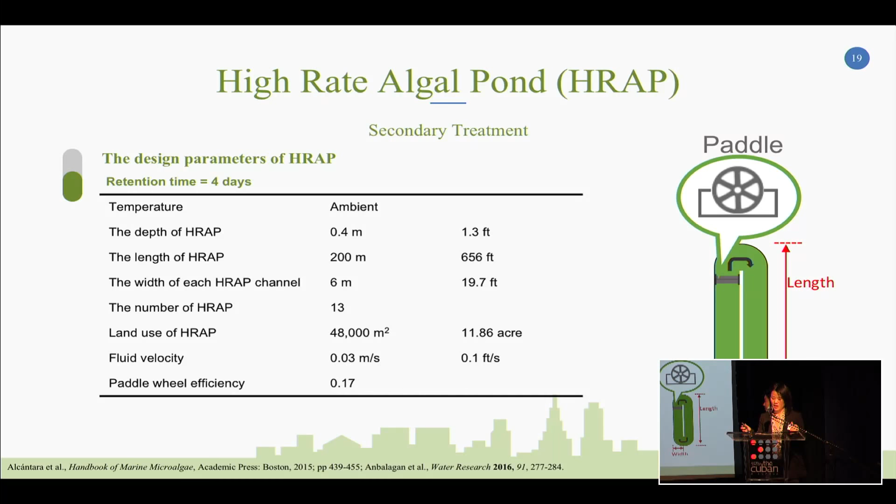At this point in the wastewater treatment process, there is a lot of total suspended solids, including microalgae biomass, in the wastewater. So after the high-rate algal pond, the wastewater would flow into the microalgae harvest and clarification settler, which is a lamella plate separation clarifier.

Coagulants such as alum and ferric chloride disrupt anaerobic digestion by creating a film around the agglomerate of microalgae, so that was not an option for us. So we looked at a case study in New Zealand that utilized lamella plate separation.

The water would come in through this inlet with suspended algae and total suspended solids within. It would flow in, then the flow rate would temporarily stop, allowing gravity to settle the suspended algae and solids down the lamella plates. This sludge accumulates at the bottom and is pumped back into the covered anaerobic pond for anaerobic digestion, while the clarified effluent flows out through this outlet.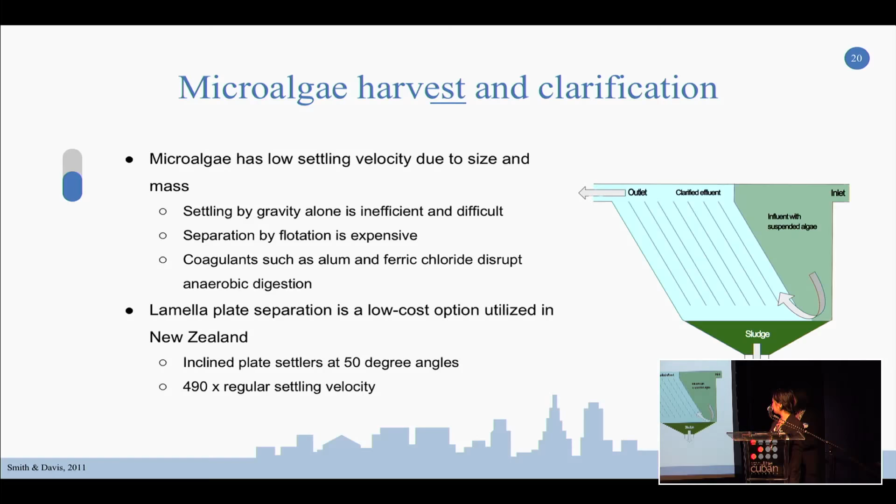This method would increase the settling velocity by a factor of 490 times. We would have 2 clarifiers for this presentation, with 7 inclined plates per clarifier, at an angle of 50 degrees to reduce clogging and also reduce the need for backwash, which requires a lot of energy as well. The total suspended solid removal efficiency is 90%.

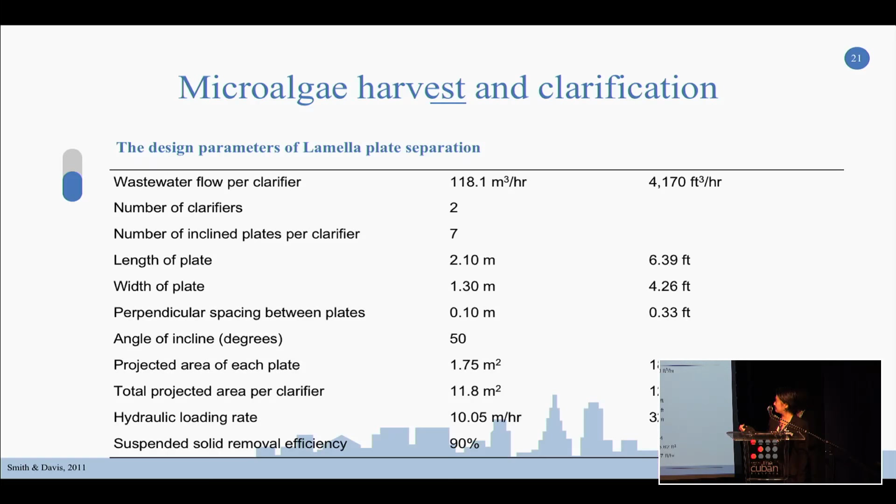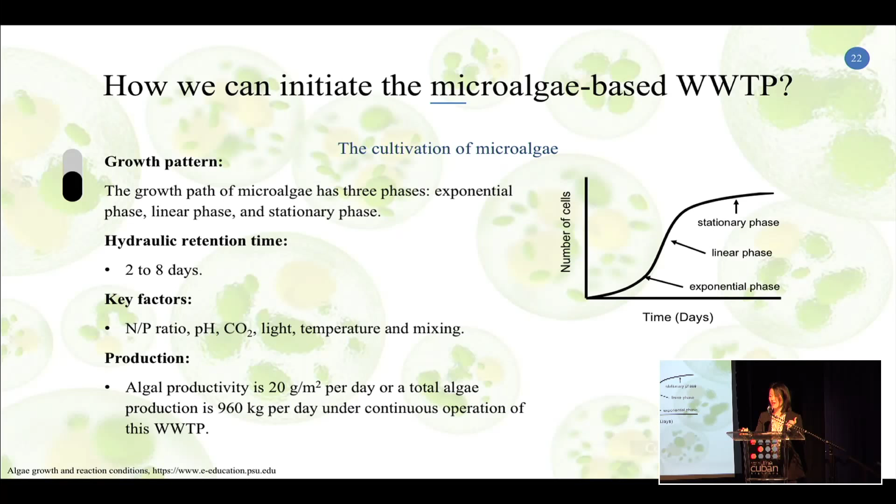To make sure the plant works the best, we need to check the conditions of the wastewater treatment plant, because algae require a specific environment to grow. The main factors affecting microalgae growth include light and temperature. Because the high-rate algal pond is an open pond, the light and temperature will depend on ambient conditions, so we looked into the climate conditions in Havana City.

It is pretty good. The average temperature ranges from 21 to 27 degrees Celsius. Even though summertime has rainy days, the sunshine hours can still reach about 10 or 11 hours. So it is feasible to build a microalgae-based wastewater treatment plant in Havana.

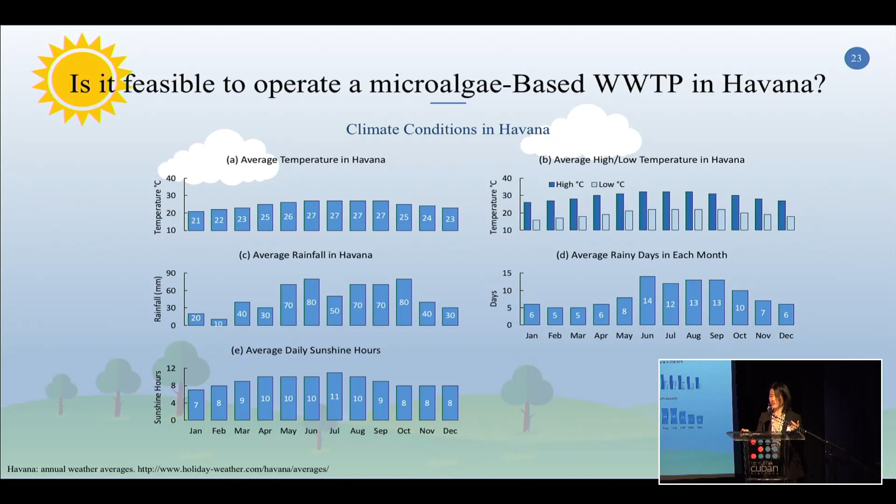Also, the land use of our treatment plant is not large, and we looked into the topography in Havana City. The elevation level is not high in Havana, so it is also feasible in terms of land use.

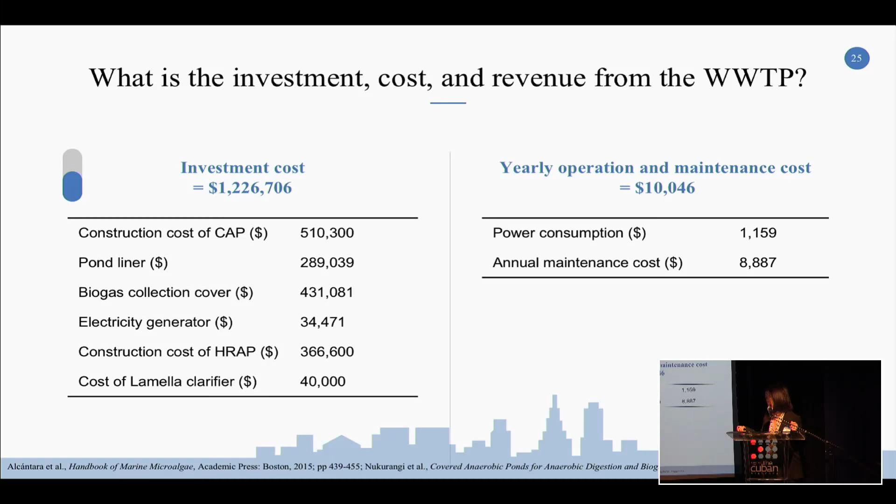We also calculated the benefit, including the heat revenue and also the utility revenue from the local residents, as well as the fertilizers coming from the biomass generated from this treatment plant. The total revenue could reach 0.6 million per year.

To conclude, our proposed microalgae wastewater treatment plan is to treat 2,825 cubic meters per day with a population of 10,500 people. Our annual benefit is $681,156, and we believe that Havana has sufficient topography, land use, and existing infrastructure to provide an efficient solution to untreated municipal, industrial, and agricultural wastewater in Havana, Cuba.

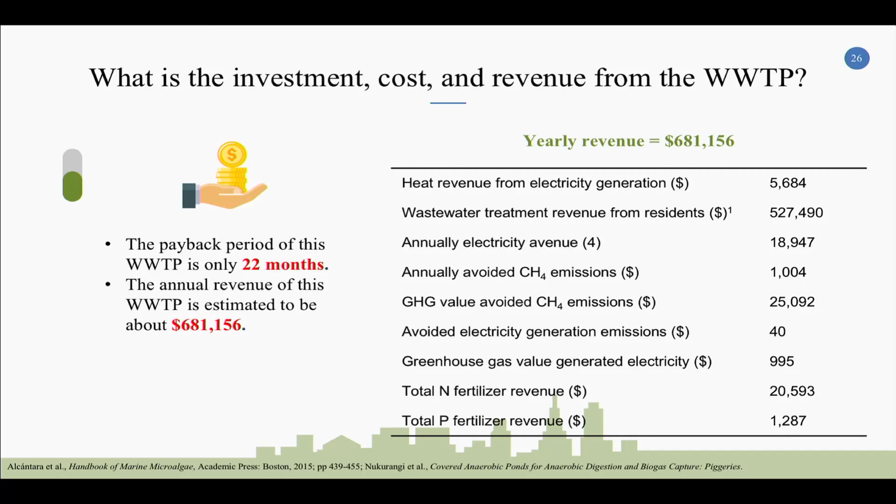Also, these numbers were based on U.S. wastewater treatment use and fees. So our avoided CH4 emissions as well as our methane production would counteract the reduction in revenue, I believe. Even if this was significantly reduced from the wastewater revenue from the citizens, the biomass production, the fertilizer production, and the methane production would counteract that as a buffer.

Any questions from the audience at this time?

Thank you, congratulations. I have two questions. One relating to operability of the plant. Do you think that the operational expertise exists or could exist in Cuba to operate a fairly sophisticated plant like this?

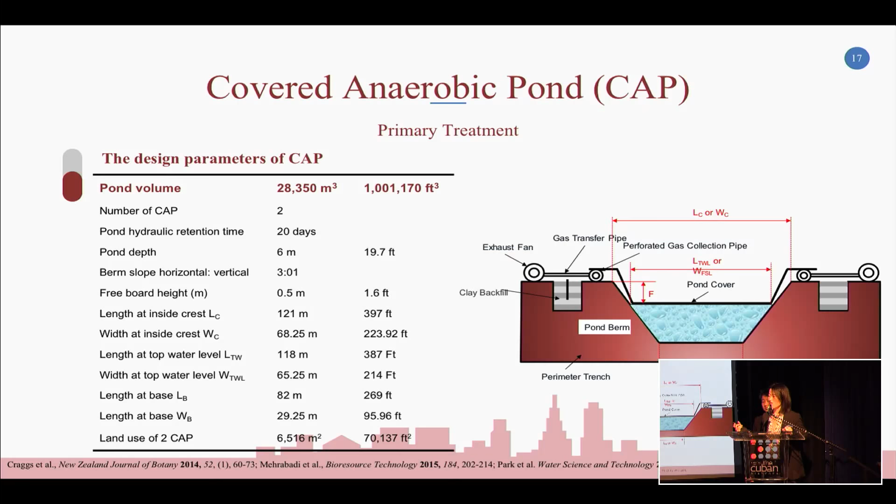Yeah, actually, it is not complicated to operate this treatment plant. This one doesn't really need operation. The only process will be to extract the biogas, and it will need some people to keep an eye on it, and it is very easy. Also, for the HRAP, it is also easy. The only maintenance will be on the paddle part, because we need the paddle to facilitate the wastewater flow. So it is also easy to operate.

Okay, thank you. The second question has to do with land. If you were to put side by side this type of plant and a more traditional activated sludge plant, on a relative basis, how much land would each one take? Does this plant take twice as much land as a traditional one, or three times? I'm concerned about the availability of land to implement this on a bigger scale.

Yeah, actually the CAP plant will not take a lot of land use. The problem is the HRAP, and it is true that the microalgae-based wastewater treatment will take more land use. But we think it is still feasible, and we referred to our advisor, Dr. Cookman, and we said that our treatment plant is about more than 10 acres, and he said it is fine for a treatment plant.

Okay, thank you. Thank you.

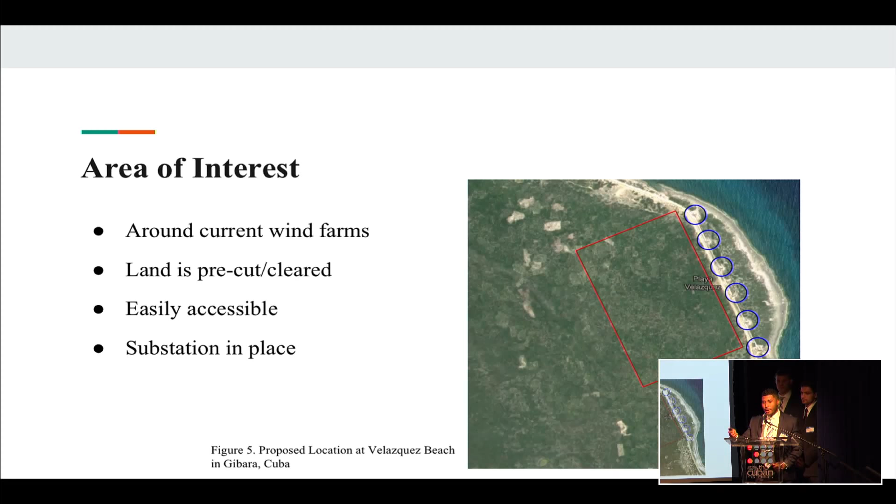When determining our location, we finalized on a beach called Velazquez Beach that is 1 to 2 miles away from Gibara, Cuba. As you can see in the picture, those blue circles are the current 6 wind turbines that exist. To the left of the wind turbines, you'll see a red square—that is our proposed area where we'd want to set up these solar panels.

This land will be approximately 762 meters by 305 meters. This should accommodate approximately 82,500 solar panels, and it would generate roughly 12 megawatts, give or take, at peak capacity. It could potentially power at least 3,400 homes.

It has a very similar design to the one we want to propose—a linear setup where the solar panels are set up in a parallel fashion. This also maximizes land usage and allows us to install these solar panels in a very compact fashion. They will be set up on metal railings as well.

That would give some flex room. Since Cuba is a tropical island, we know there are going to be strong winds every now and then, and it goes through natural storms. So by giving these metal racks some flex room, it allows the system to be a little bit more stable, which we figured out from our research.

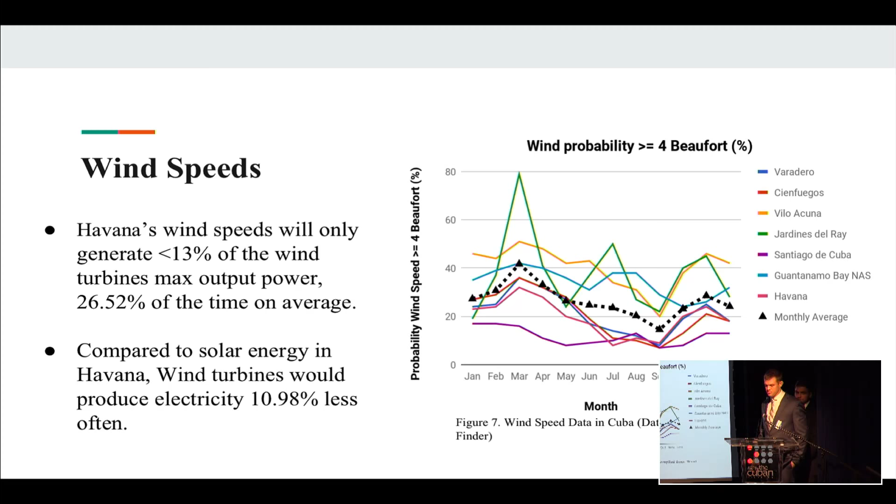For static setups, they're usually all in one line. They have to be spaced out about 7 times the length of the rotor. For the 750 kilowatt Chinese wind turbines, that's about 50 meter rotors, so they're supposed to be spaced between 350 meters in order to be most efficient and have the least amount of wind turbulence.

Again on area usage, solar uses approximately 3.5 times less space than a static wind turbine setup where they're all in a line, and 9 times less space than a multi-directional wind turbine setup, where they're made to change angle with the wind to get maximum efficiency.

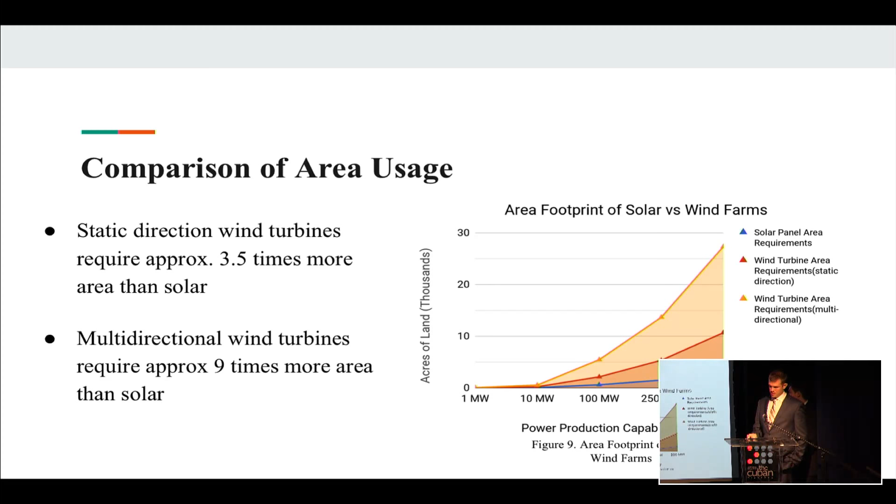Cost of solar versus wind. We couldn't find a reliable source in Cuba for actual prices, so we based it off of US pricing for the actual product itself. Between 85 cents to $1 per watt is pretty typical for the cost of solar panels. And for a 1.5 megawatt GE wind turbine, that's a pretty common model, it's approximately $3.3 million, which is about $2.20 per watt compared to the 85 cents to $1 per watt of solar.

In conclusion, we think solar energy is a great renewable energy resource for Cuba. They already have some solar and wind, but if you can implement solar and wind in the same area, kind of like what he was saying, the area is already pre-cut, there's already a road, there's substations involved. It would reduce the cost to already just tie into the electrical infrastructure that's presently available. And it would also minimize land area usage. Cuba's not the biggest country in the world, so they don't have the most land. They can't afford to just make massive solar farms like in Southern California and out west in the United States.

And I think that's about it.